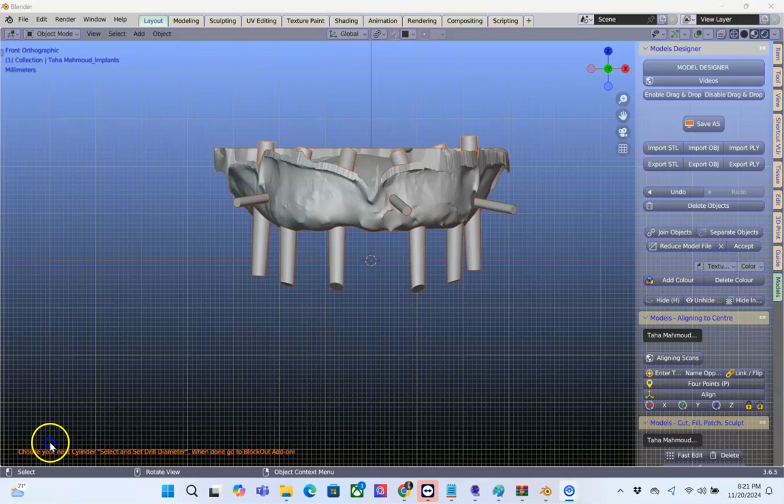Hi, I've been asked to figure out how we can make sleeves on this Anatomica. This is quite simple and it follows a similar routine to the other video that I've posted.

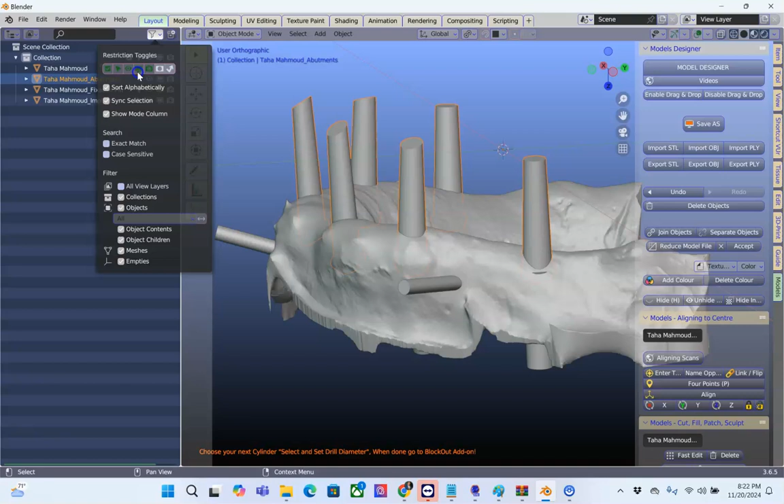First of all, what I want to do is manage some of these objects. I'm going to click this little icon, the little monitor thing, just to hide that. Also this one I don't need to see at the moment.

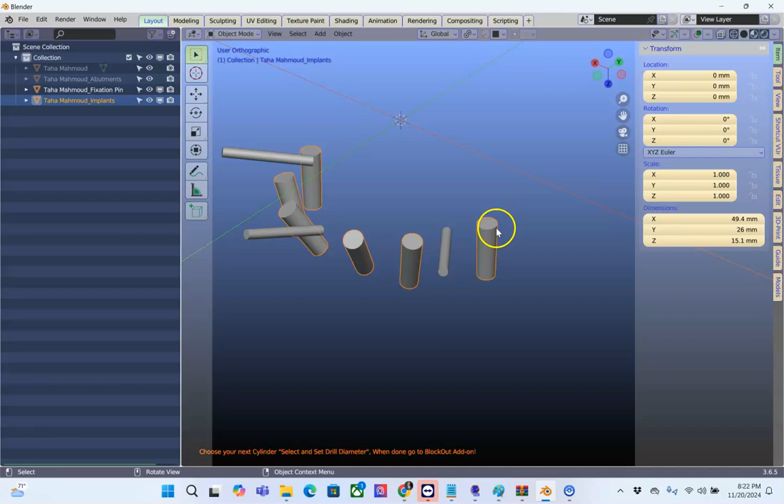Notice that the point of origin is in the middle and we don't have a coordination, they're all zeros. Now I want to create a coordination for these, especially if we want to make this bigger, the actual hole for the sleeve larger. So to do that, I'm going to go to the model designer and click on separate. Now these are all separate, and I'm going to zoom in and then double click on this edge loop.

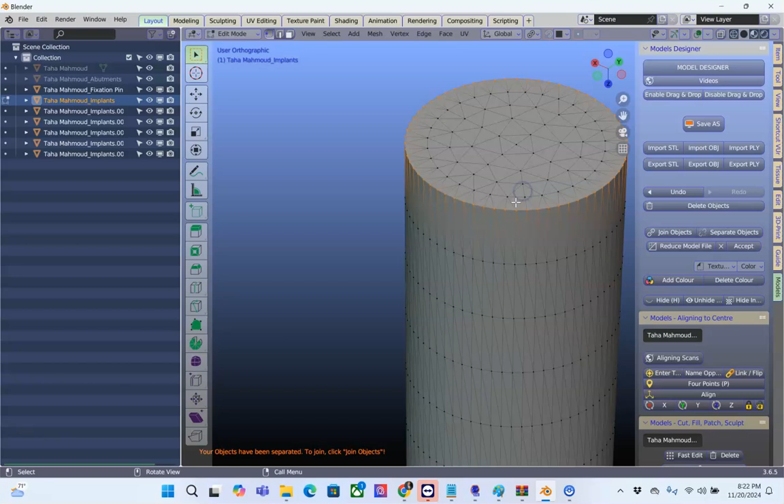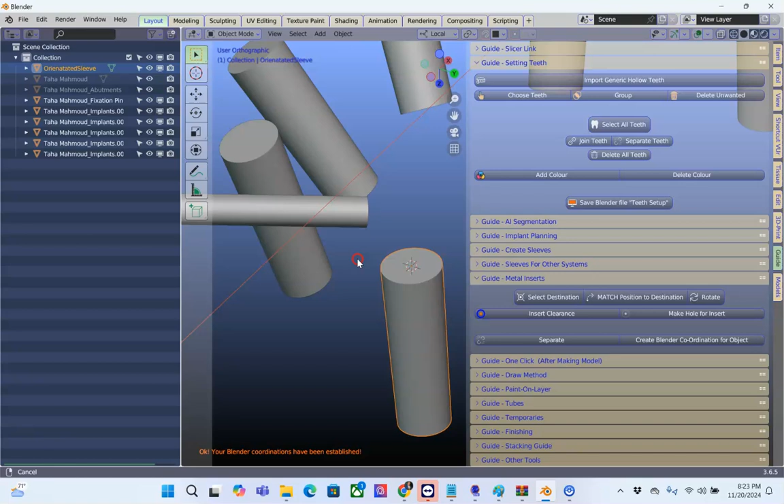Go to the guide module, go to the metal inserts, and we're going to give this a coordination. So hit this button over here. It says create blender coordination. So the scene is going to snap in front, and now if I have a look at it, I've got a coordination XYZ. If I have a look at the items, I've got 4.1, 4.1.

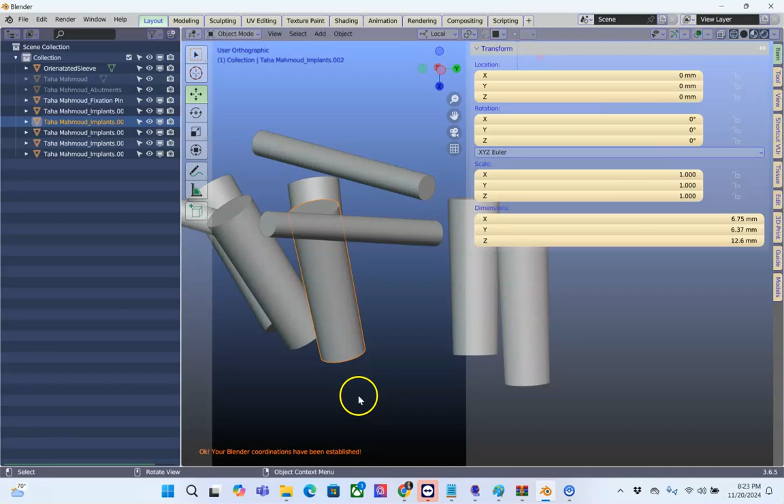We couldn't tell this earlier because of the alignment in space, because it's 6.75. That's because of the bounding box, but this is now correct.

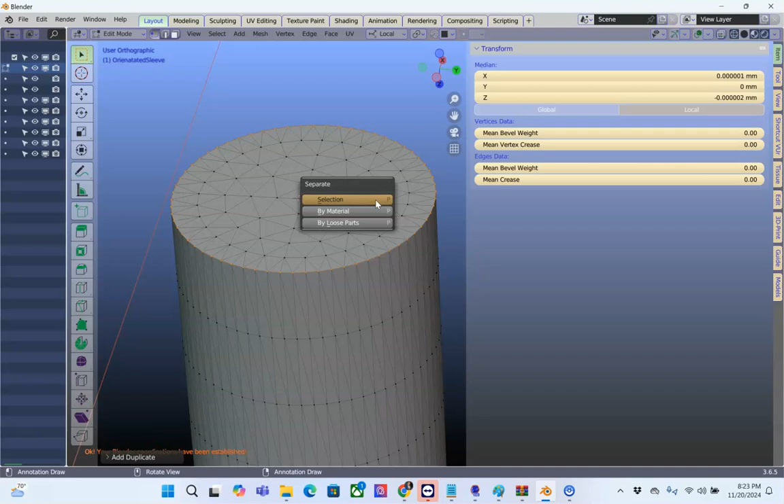Now assuming we want to have a 5mm hole, what I will do is go in there, tab, select the edge loop, and go Shift D and then enter, click P on the keyboard, by selection, and then tab to get out of it.

You'll see now that we've got this edge loop going on. If I hide the cylinder, we'll have this edge loop, tab, A to select all, and F to make a face. Then I'm going to extrude it.

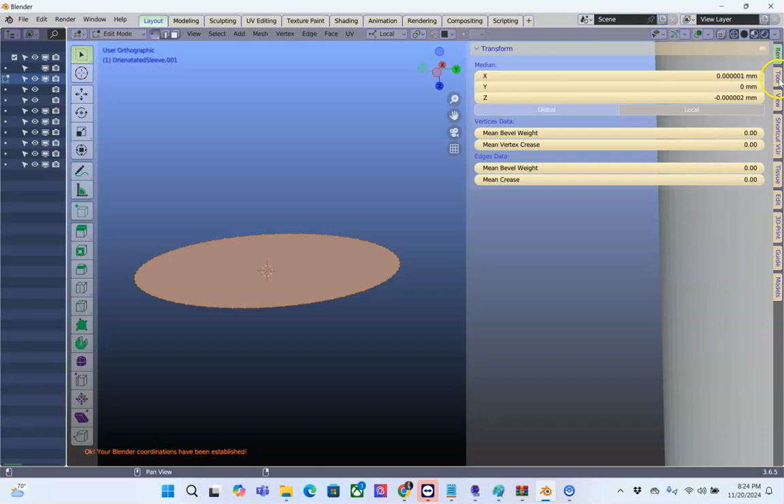Just say for example this is now 4.1. Now I want to change this to a different dimension. So here we can see 4.1. If I wanted to scale this, for example, I can now freely scale it.

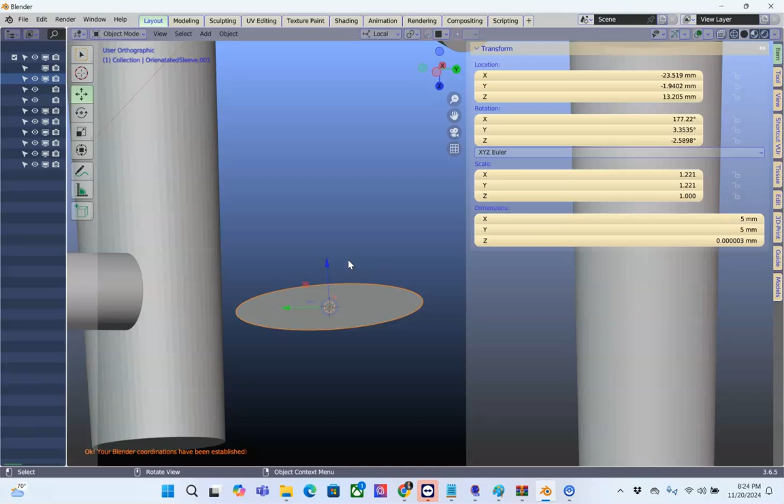So just say the hole is 5 or 5.5, I'll just put 5 in here. We've got this at 5, and then tab. Just say the offset is 9.

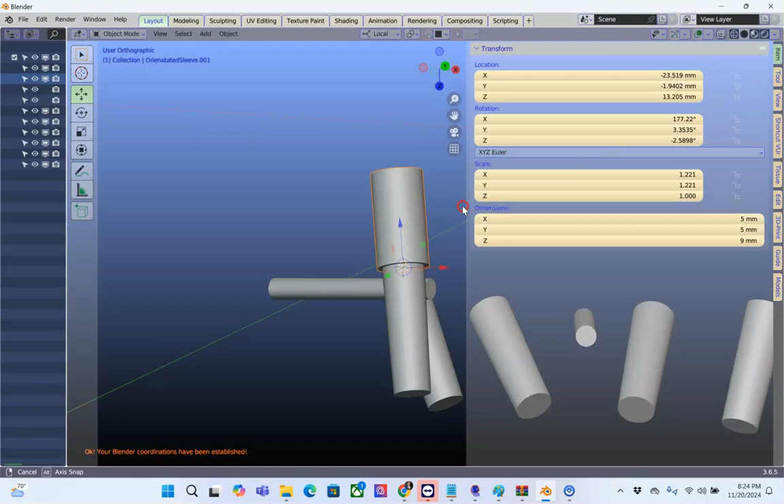So extrude 9 - I've got to go into edit mode, E to extrude 9, enter. So now we've lifted this up and we want to use this to make a hole going through our sleeve. This is quite easily done because all we need to do is go to the guide module

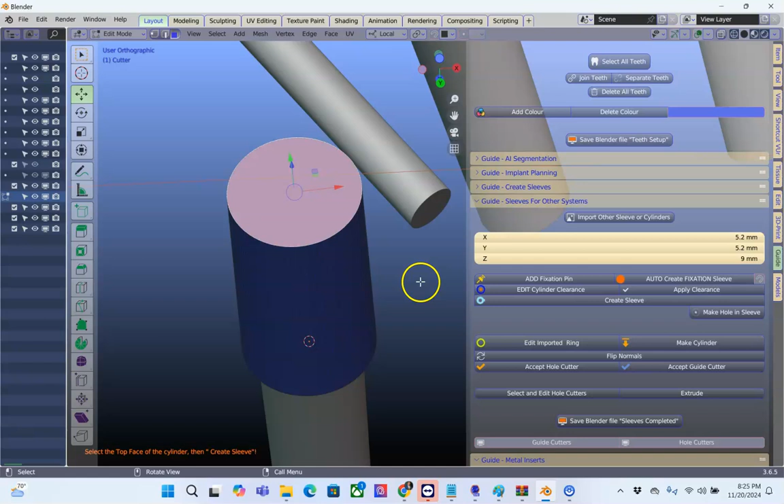and then go to sleeves for other systems. Click on this button here, edit cylinder clearance, put your clearance and then apply that, and then select the top of the face because we want to tell Blender that we want to put a sleeve up top here, and then create sleeve. Here we've got the sleeve.

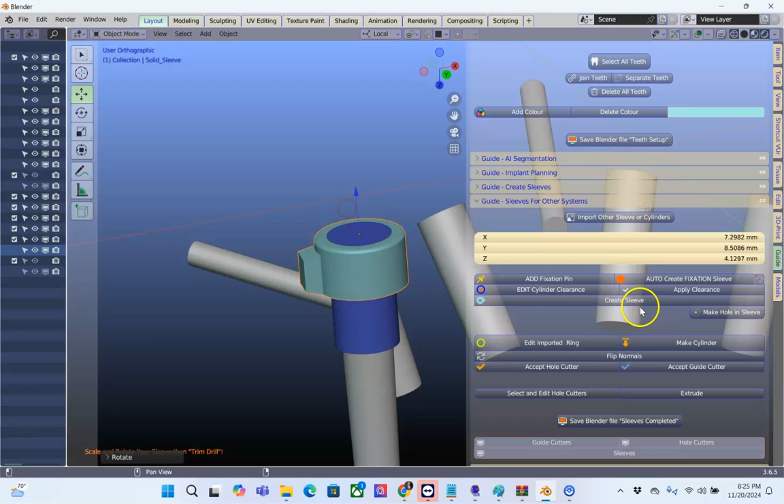We want to put a little bit more of material, so S and then SZ to scale it smaller. You can also use the R key to get this timing notch. Finally, just make a hole through it, punch a hole.

Now here with these, we would do this exactly the same. So first of all, I want to separate these objects. They need to be individual objects, you see.

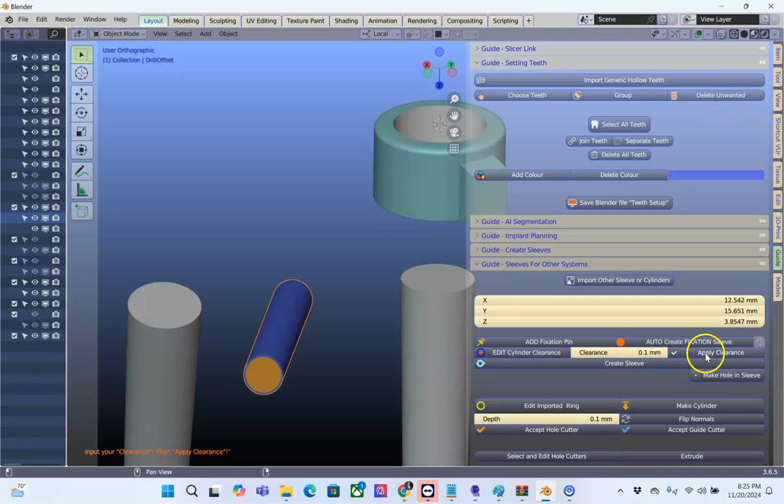Then we're going to go back to the guide and do the same. So here, cylinder, and then apply that, select the top of it, create sleeve, and here we go, punch a hole through it. These are for our fixation pins.

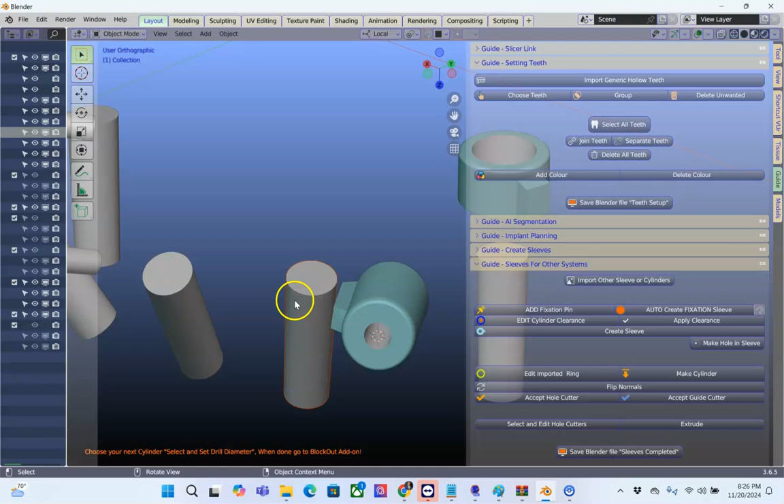So very easy to understand once you know. You'd need a coordination, that's the first thing. You need to separate the top, and with the coordination we'll have the diameter. You can change the diameter, extrude it, and that will give you the offset. And then we're going to just use these buttons here to create our sleeves.